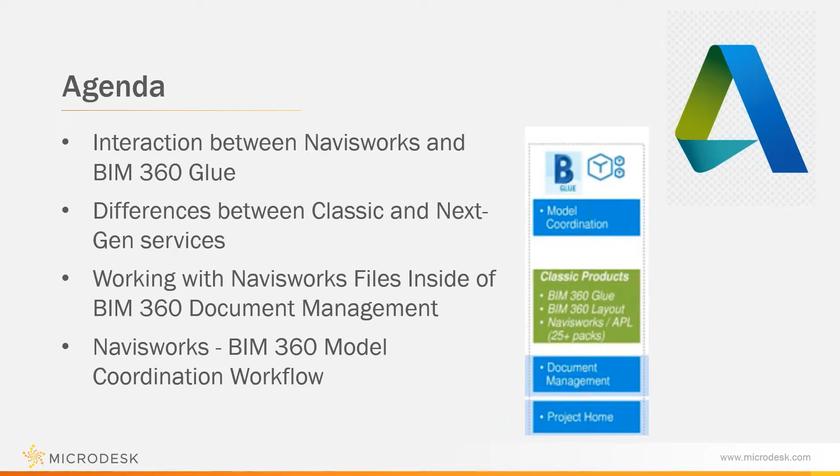The process for traditional clash detection, and how designers sent models to a model coordinator who merged those files in Navisworks, was a time-consuming effort. Everyone had to gather their models and get them to the BIM coordinator, and then he had to go through the process of getting it ready for the next stage.

Once the cloud platforms became more available and more accessible, it shortened that time frame by just allowing people to load their models and have some of that integration happen immediately.

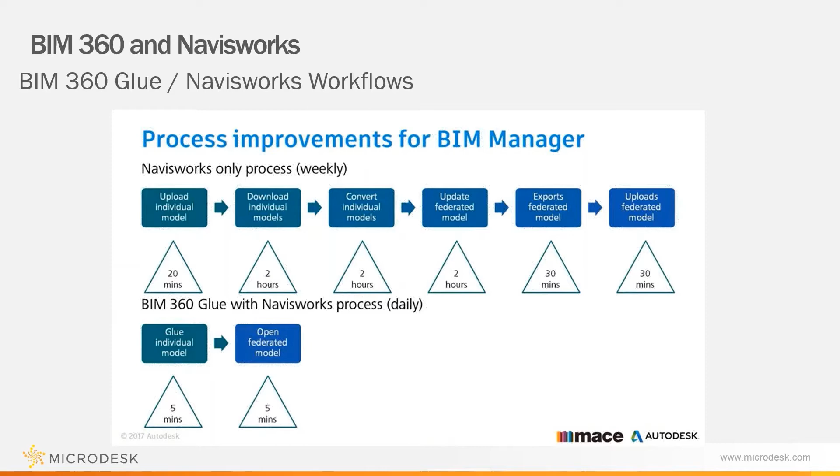When dealing with models coming from all sources to a BIM coordinator, this process involves the model coordinator merging the files in Navisworks. His or her job becomes to analyze the errors, merge the models, perform clash detection, and document any type of collisions.

Some clashes are simple and obvious, but others are not. They can end up with hundreds of clashes that the model coordinator needs to prioritize. It's a heavy burden for a BIM coordinator to understand and filter amongst all these clashes.

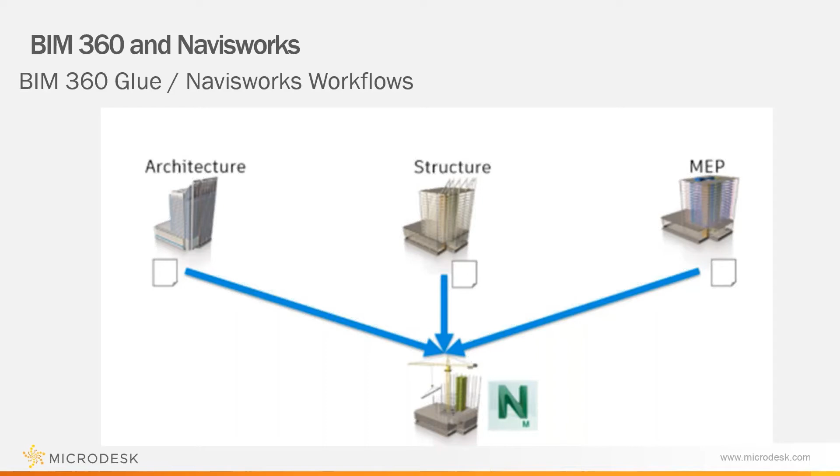You could argue that the different disciplines hand over their responsibility to the model coordinator to check their design for them, when they themselves should have control over their own models and how these fit together with other disciplines' models, so the model coordinator doesn't become the bottleneck in the process.

The Glue Navisworks integration gives every designer in any discipline the possibility to merge their models in the cloud and perform clash detection in a powerful, user-friendly, and simple environment. When working with Revit or any AutoCAD vertical, you could publish the models through a simple Glue add-in, merge your models in Glue, and review your model against other disciplines.

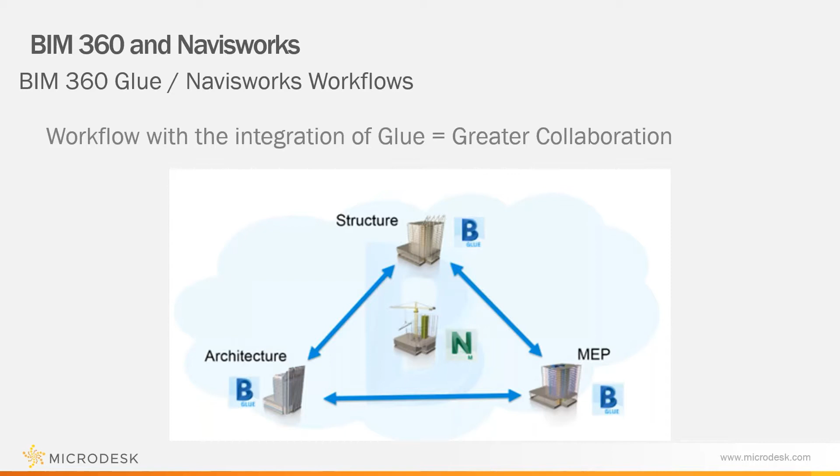The result, when designers and engineers do their own clash detection against the models, will be fewer errors and higher quality models before sending them to the model coordinator. This allows the Navisworks specialist to focus on advanced clash detection, such as avoidance and rule-based clashes. There are various approaches on how you can use Navisworks and BIM 360 on your projects.

It depends on the project scenario which approach is right for you. Tasks such as sharing coordinated models with the team, collecting project models from the team, using the team to coordinate and resolve clashes, and coordinating the project in BIM 360.

Users can take the aggregated project model in Navisworks and share it with the rest of the team in BIM 360 Glue. To do this, you start by bringing the various discipline models together in Navisworks, just like you would do today. Then use the BIM 360 add-in app to glue the models in BIM 360 Glue. This provides access to the latest model and intelligent model data for the rest of the team.

BIM 360 Glue enables collaborative project review workflows where team members can have one-click access to the model, and easily view, navigate, and add markups and comments.

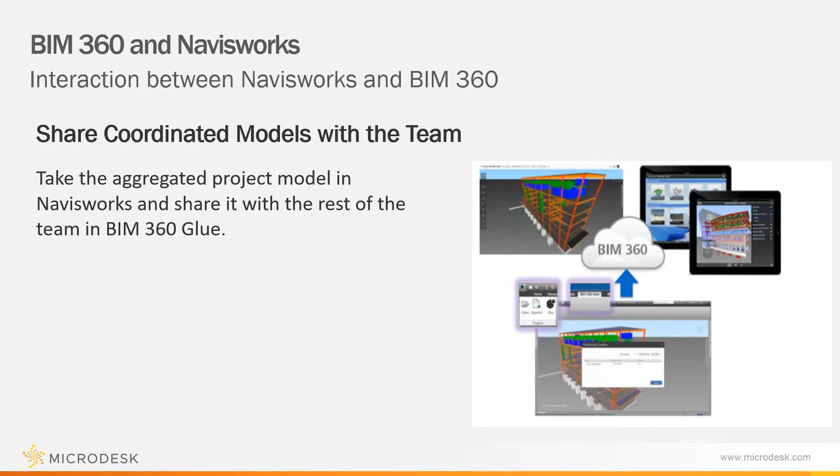Using BIM 360 to gather and manage the models from the team, and then bring those models into Navisworks for coordination and analysis. You can use BIM 360 to collect the models from your team and centrally manage those models with version control, activity tracking, and notifications whenever a new model or version is added.

Once the models are in BIM 360, you get all the other benefits with anywhere access in the project review and markups for the rest of the team.

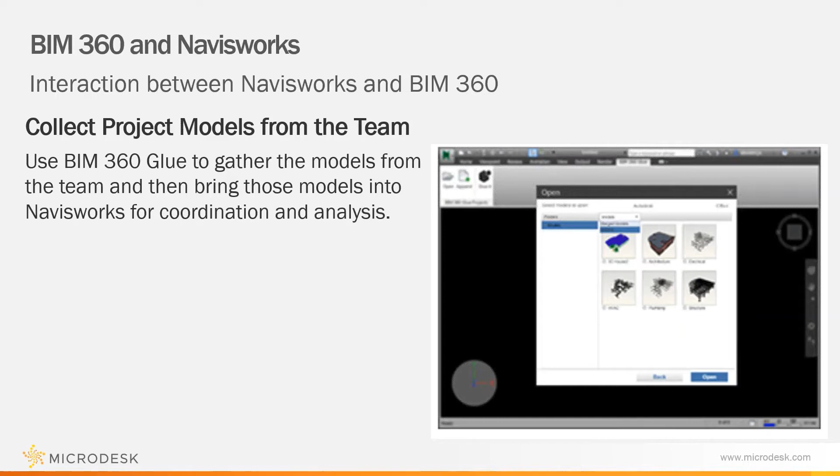You can also allow the team to coordinate amongst themselves, which helps them resolve many of the smaller obvious clashes before their weekly coordination meetings. With BIM 360 Glue, the team has the power to continuously coordinate between themselves and resolve clashes quickly. This continuous collaborative team-based coordination greatly reduces the number of clashes to review at the weekly coordination meetings.

Project teams can use Navisworks for formal clash detection and publish the models to BIM 360 for team-based coordination and collaborative project reviews. It can also be used to provide easy web and mobile access to project stakeholders.

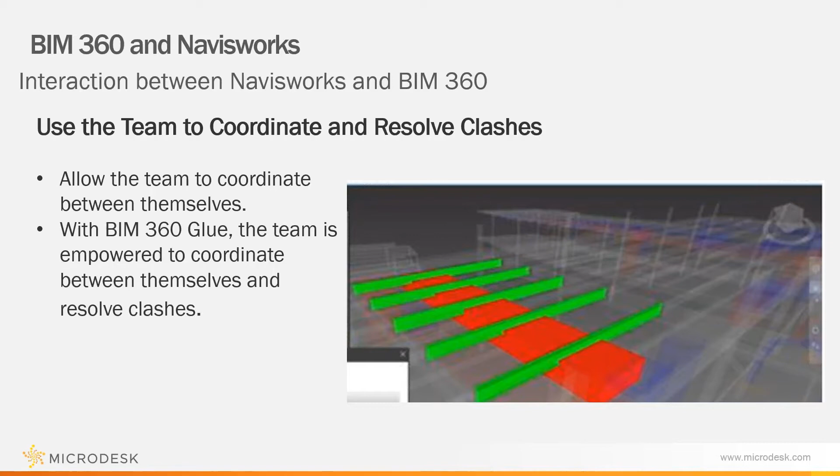We use BIM 360 Glue for all project clash detection and collaborative coordination, and Navisworks for advanced workflows such as model-based quantity takeoff or animated timelines, and to develop stunning renderings.

Some of the workflow limitations that occur with the Navisworks and BIM 360 Glue process are that not all Navisworks specific data that are maintained when viewing the merged models in Navisworks are visible if you open the merged model in BIM 360 Glue. This leads to a siloing of information such as clashes.

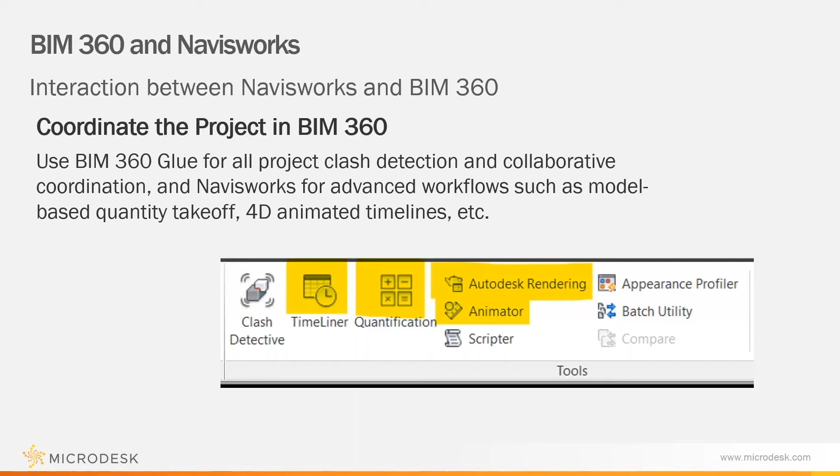You also have a situation where views that aren't shared are visible only in their respective programs, although Glue views are usually shared.

When we are using Navisworks and taking advantage of BIM 360 document management, this integrated BIM 360 Navisworks solution allows you to connect with your team for collaborative project review, coordination, and issue workflows.

In Navisworks, models are merged and can be loaded into BIM 360 document management. Any changes you make to those models in Navisworks can be saved back to BIM 360 document management as a merged model. These changes are maintained when viewing the merged model

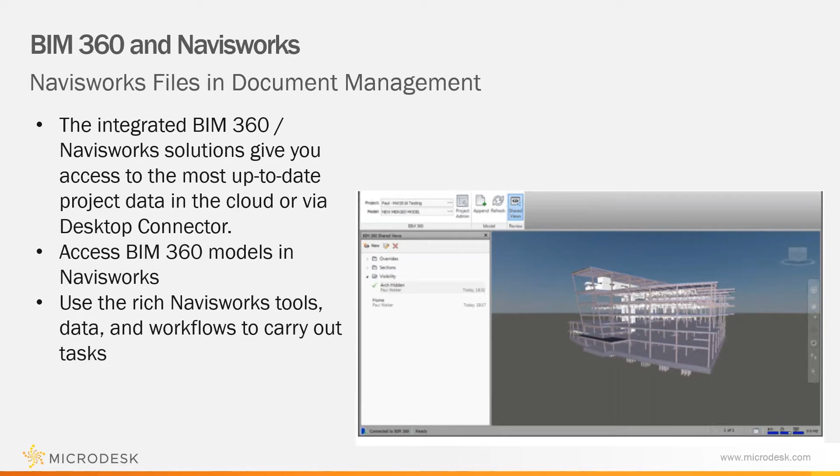in Navisworks and other Navisworks clients. However, if you open the merged model in BIM 360 document management, not all the Navisworks specific data may be visible.

In BIM 360 document management, you can view, create, and respond to BIM 360 issues on the models that are in Navisworks, gaining access through either the BIM viewer in document management or using the desktop connector in Navisworks. Issues created in either program are synchronized, enabling you to effectively collaborate on the models.

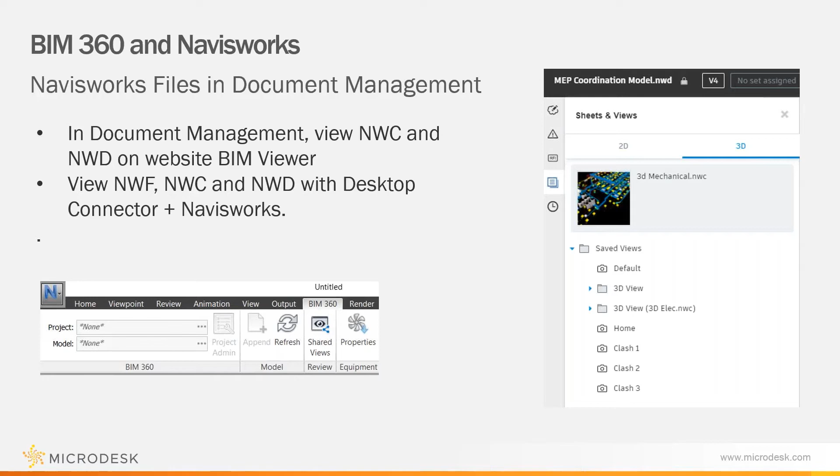Also, views created in Navisworks are seen when open in the BIM viewer in document management.

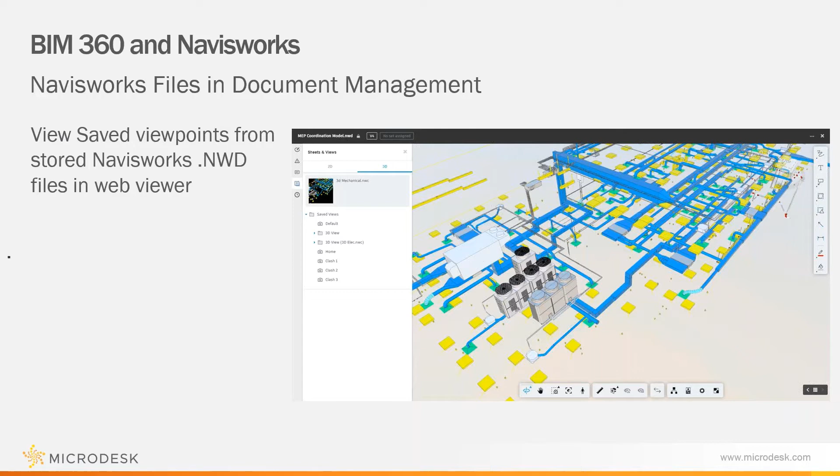You can create and manage issues related to 2D projects and 3D models at a document or project level. Issues are used by teams to identify and communicate areas of concern or improvement with project documents or models. You can work with issues in BIM 360 alone or collaborate using Navisworks.

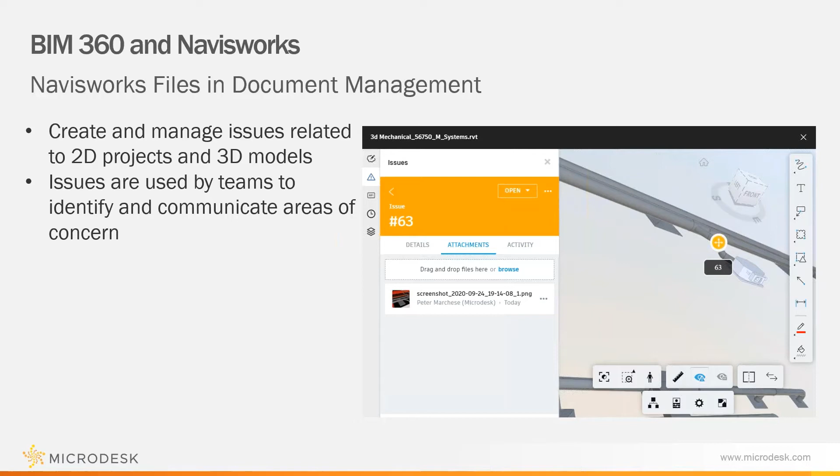But the newest integration is the bringing together of Navisworks and BIM 360 model coordination. This means combining the best of both products, the time-saving automation and cloud capabilities of BIM 360 model coordination, and the powerful Navisworks workflows that have already been proven useful. The integration allows project teams to save time with automatic clash detection, increase the quality of their models, and create

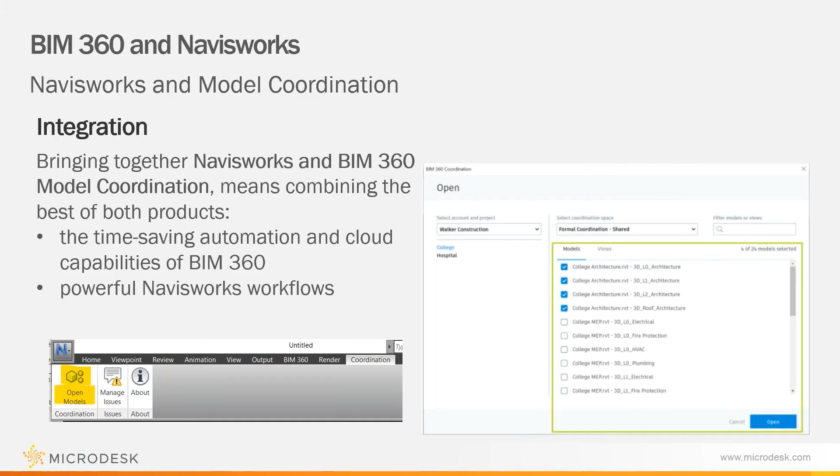a single source of truth for issue management across the entire project team. BIM 360 coordinate customers can now use complementary workflow and benefit from the best of both solutions: automated clash detection, ease of use in model coordination for discipline trade self-checking, and specific clash checking in 4D simulation in Navisworks.

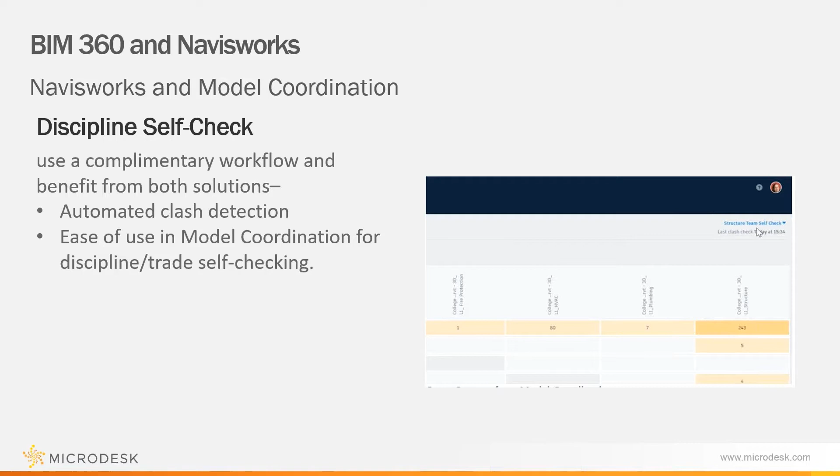Design and trade teams can self-check their models in real time using automated clash detection, while the BIM leader can focus time and resources on the largest constructability issues and open up an evolving data set in Navisworks to run specific cross-discipline clash tests on the latest design data.

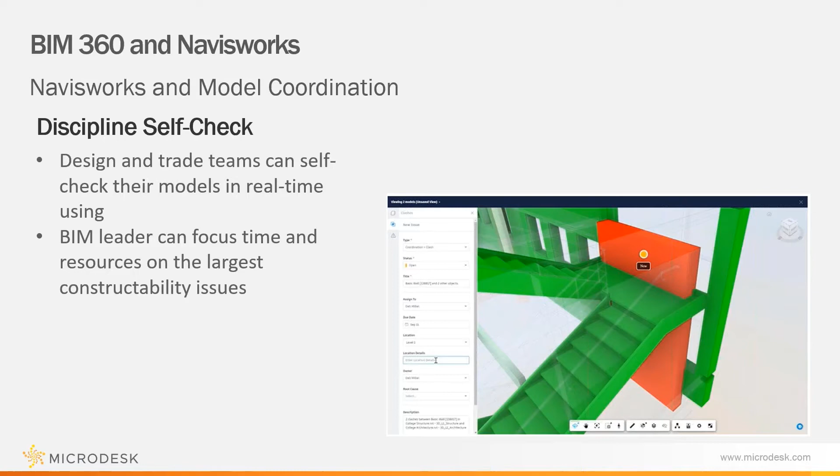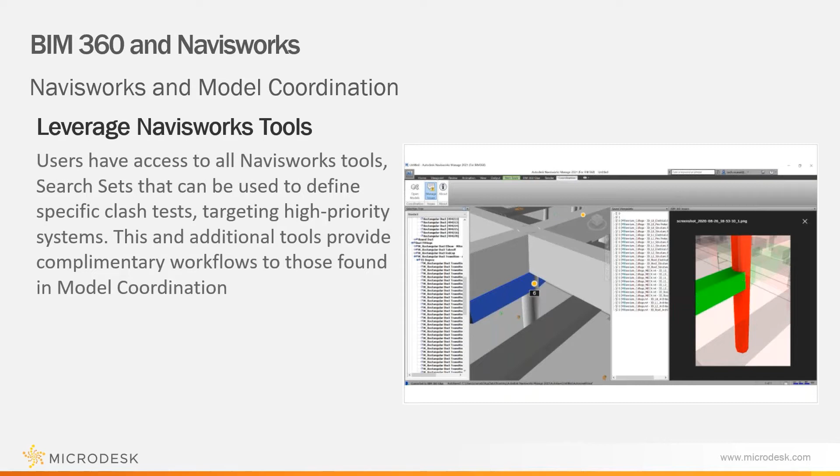With model content loaded, users have access to all Navisworks tools, from Timeliner for 4D simulation, quantification, rendering, and animator to clash detector. Search sets can be used to define specific clash tests, targeting high priority systems and object categories and checking for clearances. These additional tools, providing complementary workflows to those found in model coordination, lead to the uniting effort to support a wide range of projects.

The model can also be opened in Navisworks, where specific rules are applied and the users' expertise can be taken into consideration in order to check for larger constructability issues.

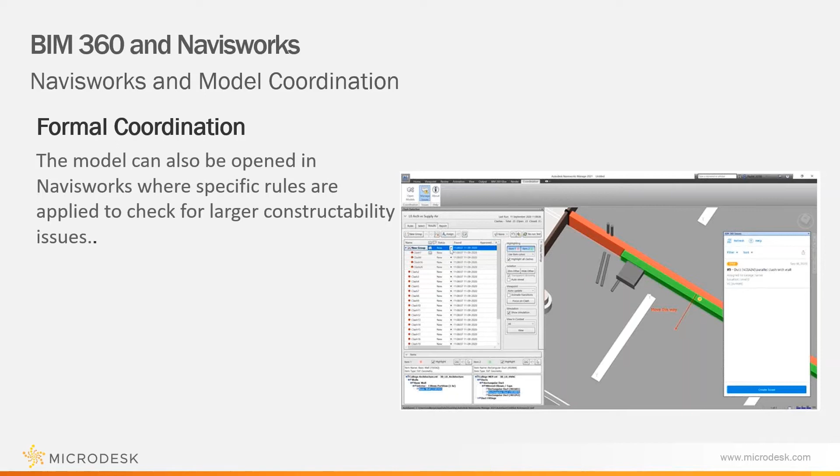Model coordination may now become a full team effort, providing accessibility to team members that do not have experience in clash detection and navigating models. This transparency provides value to your clients, allowing them to easily harness the power of the model and truly understand project design, model development, and issue resolution.

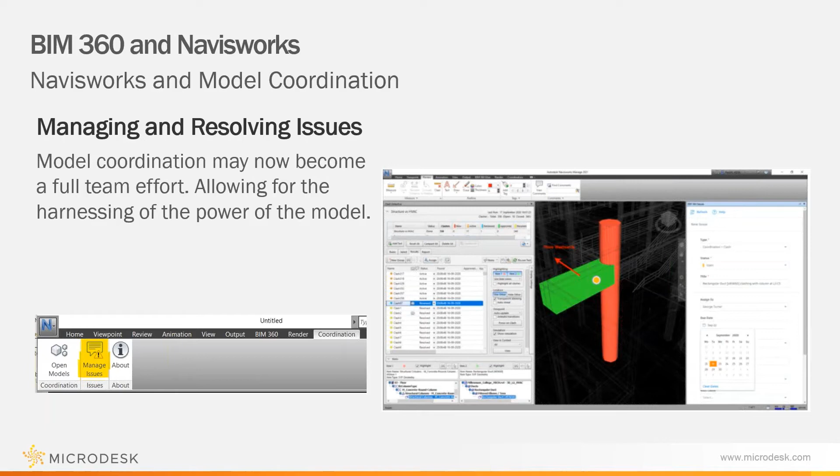With the integrated workflow of Navisworks and BIM 360 model coordination, all project stakeholders, from the field to the office, can now participate in issue tracking and resolution throughout the project lifecycle.

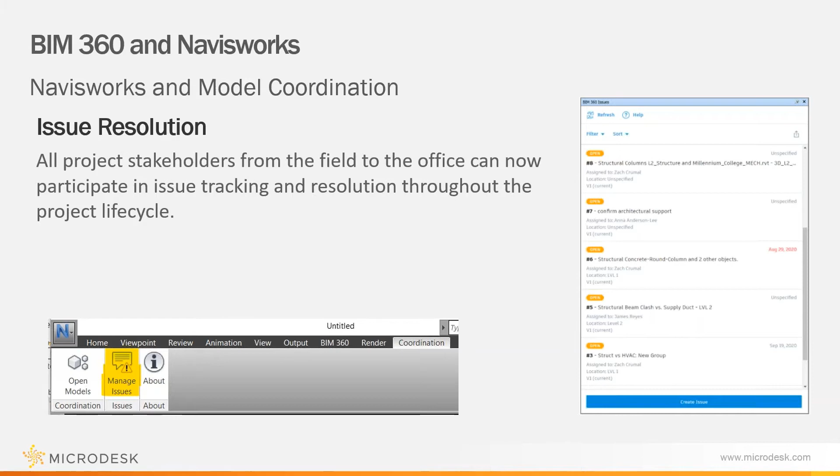Issues created from Navisworks will additionally capture a screenshot, which is attached to the issue that was created, and therefore accessible to users outside of Navisworks. The screenshot will also capture any Navisworks markups, helping to convey detail of the reported problem and information on the recommended solutions.

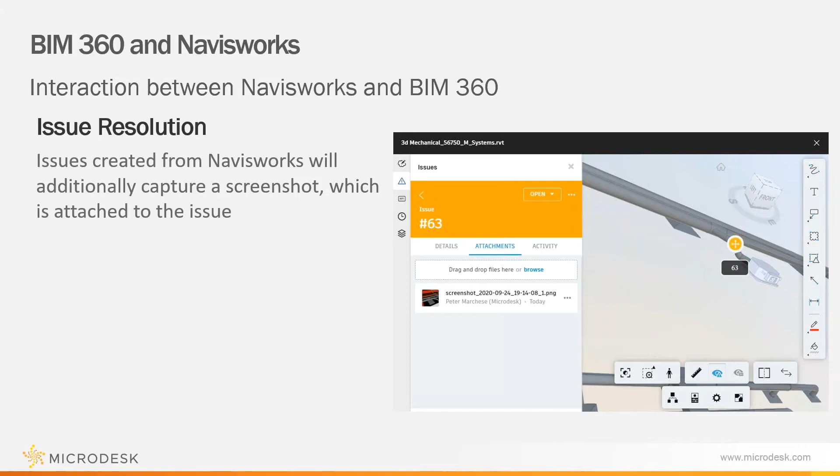Connecting Navisworks to content from model coordination gives users the ability to save NWF files to BIM 360 docs and share these with other connected Navisworks users. The NWF file contains references to the hosted design models and all Navisworks specific data along with the latest issues.

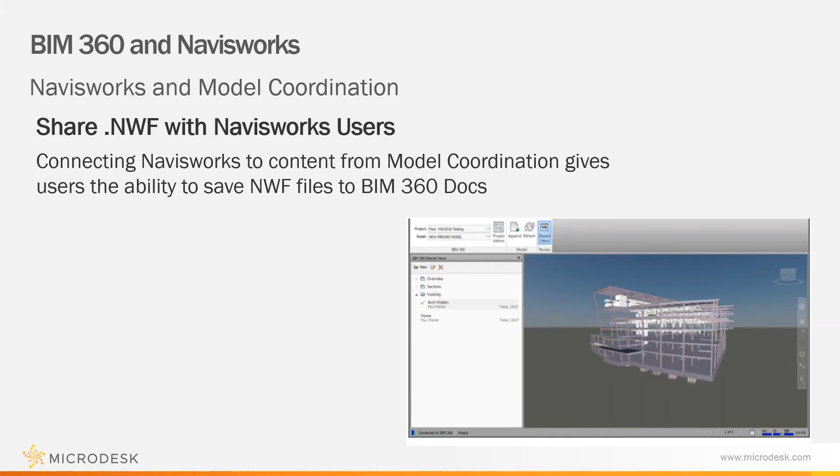So now let's take a step out and take a look at some of these changes that have occurred. So some of what we were discussing is how we can have access to our projects and our Navisworks files inside of BIM 360 document management. If I open up one of the views, you can see here I can open up the NWD file by left clicking on it.

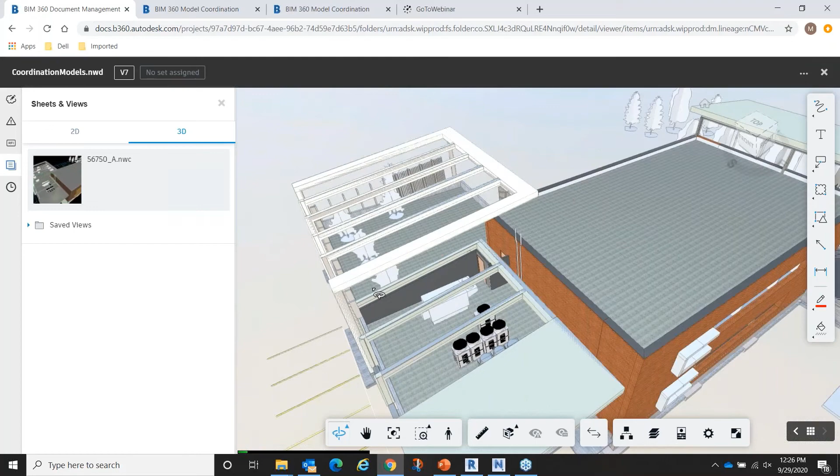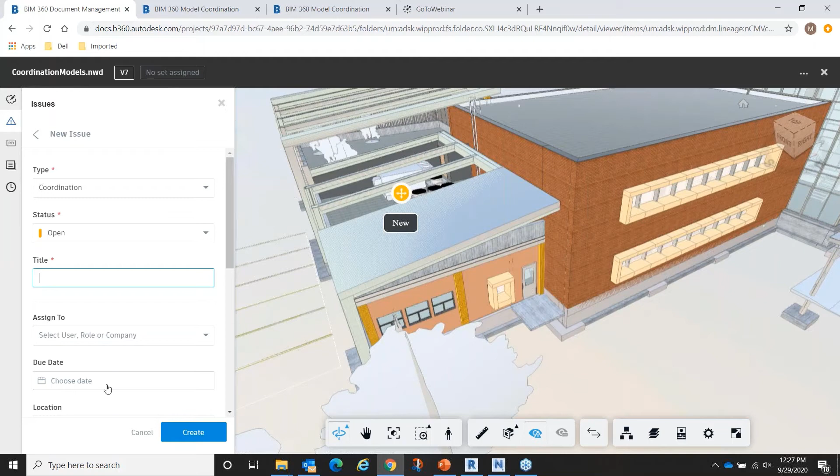So what we have here is the NWC file that I'm able to open in the viewer. I can select items. If I needed to create an issue, I can just choose the issue panel here and select one of the items. I can choose create an issue, select one of my items, and then have this issue be created inside of BIM 360, and then I would be able to view this inside of the Navisworks file, the NWC file.

This issue that gets created, and I'm just going to cancel this for a second, will show up on the list of all the issues. I'm going to back out of this for a second.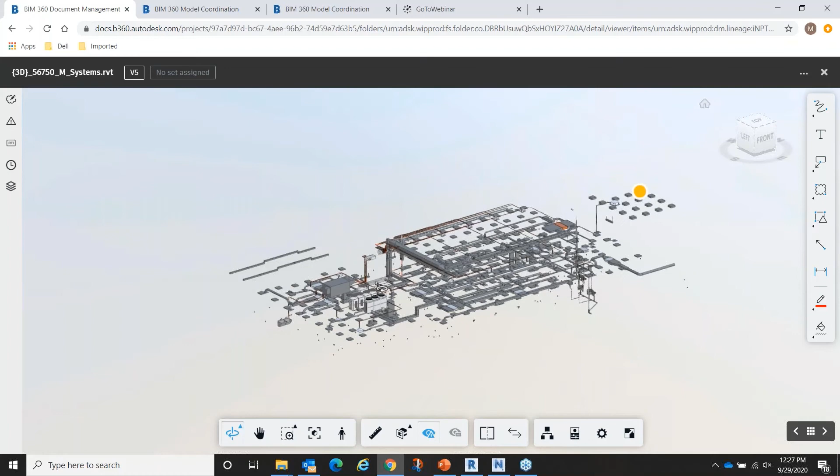You'll see I can do that same thing if I go to the coordination models. I can do that same thing within the BIM viewer, directly opening the Revit project inside of the BIM viewer, and do that same thing. If I want to create issues, I can create issues inside of this. So this is the way that it would show if we were doing this, just loading our projects into document management and then using the BIM viewer to create issues

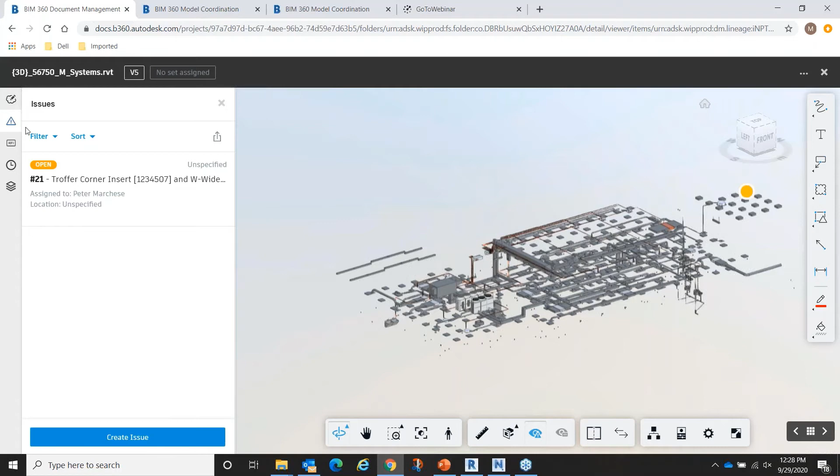and then view those issues. If I wanted to view those issues, I will close out of this and go to my issues tab, and you'll see all the list of issues.

Taking this a step further into what we would do inside of model coordination, the first thing we want to do when we set up model coordination is get our coordination spaces together, picking out what are going to be our coordination spaces.

That's going to be how we navigate from Navisworks inside the BIM 360 model coordination tab. The normal procedure is that as soon as we load those models up and set up the coordination spaces, it automatically does the clashes. This is some of the self-checking that can happen.

We can go a step further by opening up Navisworks, going to the new coordination tab, which is an add-in, and choosing to open the models, getting us directly into BIM 360 model coordination. Left-clicking on the model, on the right-hand side it gives us the model with one of the spaces, and I'll hit the pull-down arrow to show both coordination spaces set up inside the model coordination module.

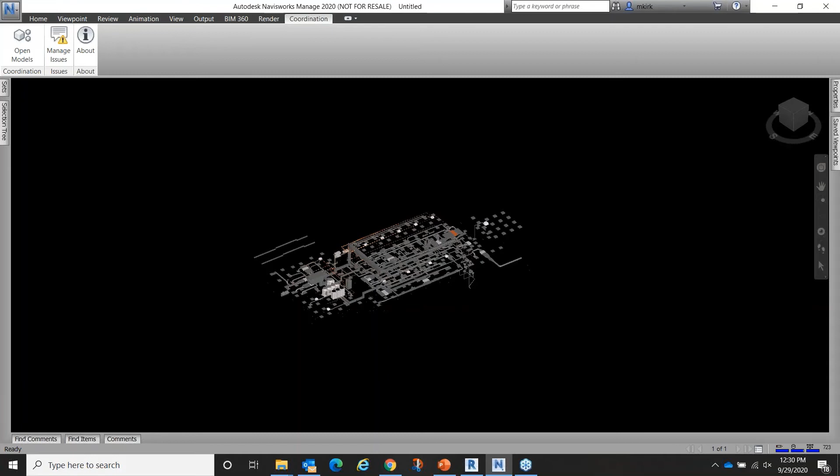While this file is open, I want to explain that since we're taking the Revit projects and creating an NWF file, this can be done by multiple users. Each of us can open up the Revit projects, creating our own individual NWF file, but the issues each of us creates will be saved inside the issues panel.

That's actually the live issues from inside BIM 360, and it'll show me those, and they'll all be saved back in BIM 360. So the next user who opens these same files to create their own personal NWF file will see the issues I created, because it's all going back to the BIM 360 issues list, pulling that information since we're grabbing the Revit projects to do this.

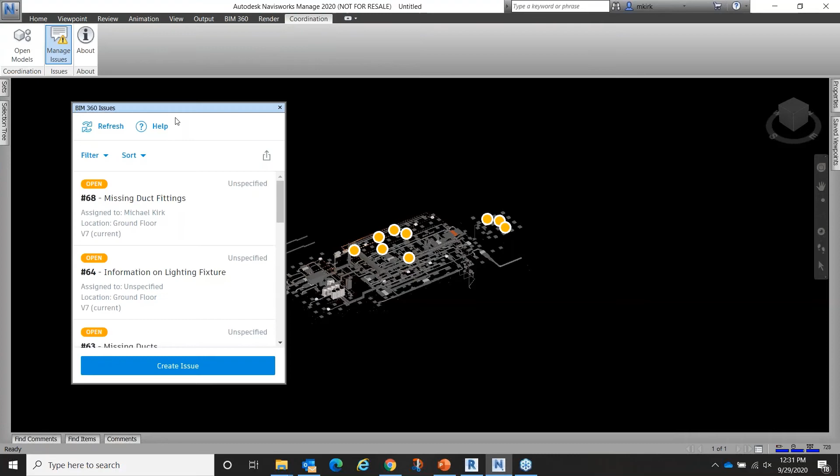So now that that's open, I can turn the issues on so I can see them, and I can zoom into an area.

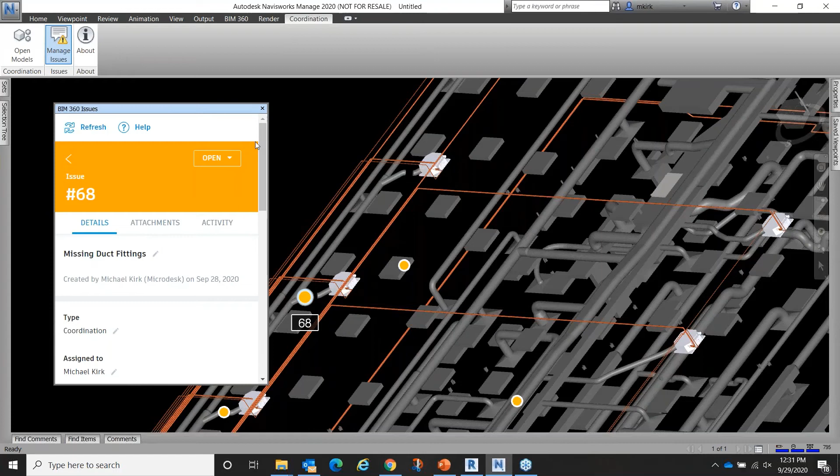One of the other things - if I wanted to create an issue here because we've got a missing duct, we have a couple of other issues here. If I select this, you'll see that was an issue. The other thing you'll see is when I left-click on the attachments for this - inside the issues field, I'll show you that when we get back to the issues field, but this is the issue that we have.

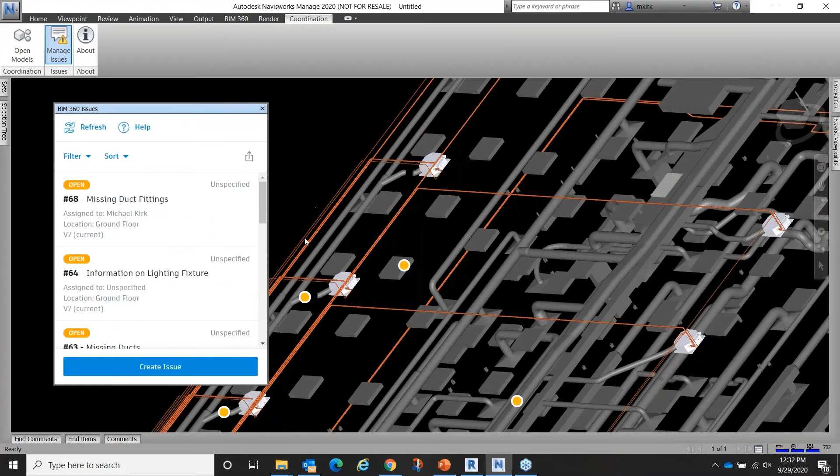If I wanted to create another issue, I'll just go back out of this and choose Create Issue, place where I want that issue to be created, and then give all that issue information.

I can assign it to a user, choose the due date for it, as we would normally do. If we were creating this, what's going to be the location? So these are all of the issue information that I would be doing inside of BIM 360.

So now I have that. If I wanted to create a description, then create that issue.

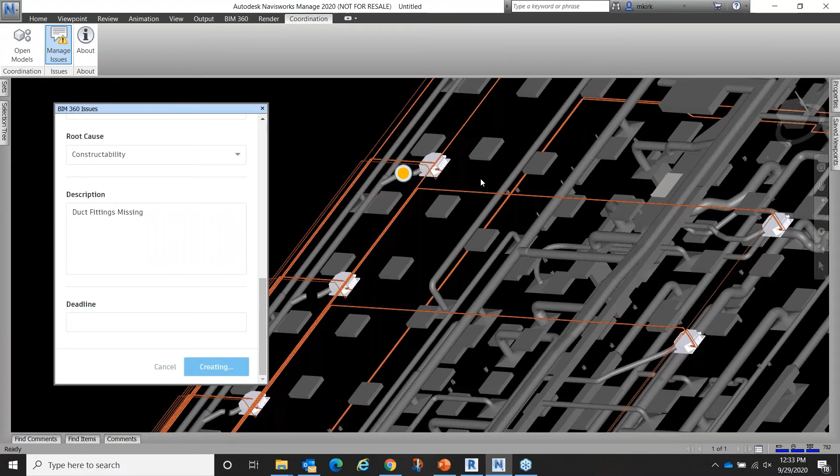The other thing with this - I mentioned each user could create their own NWF files and just pile the issues on, but if I wanted to share this, I can easily just save it as you would normally save an NWF file on the BIM 360 document management coordination folder, or one of the folders I have set up.

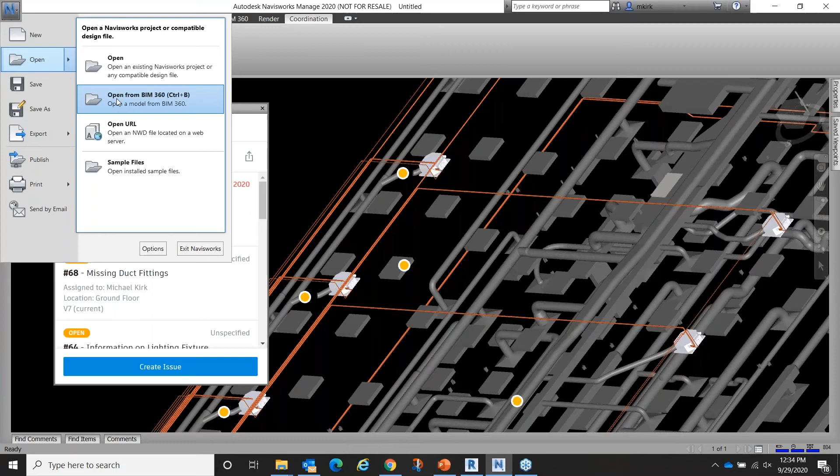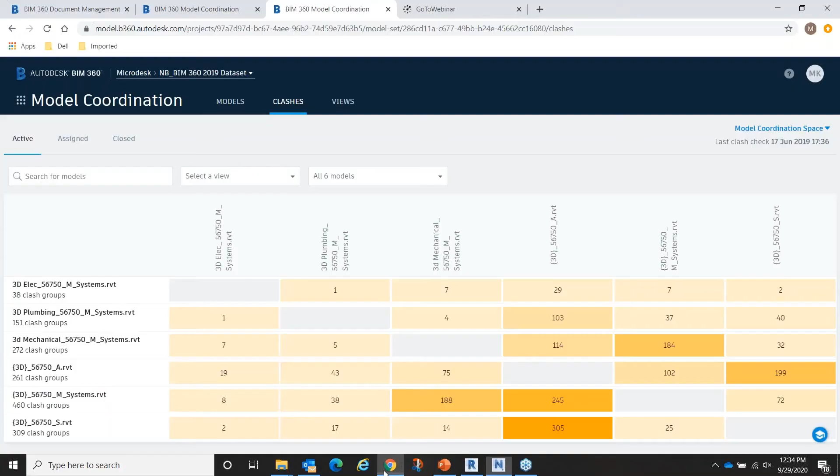That way, another user could then open up NavisWorks and open it up like a normal file, but go through BIM 360 to find the NWF file that I began. That becomes the new issue that's there. If I go back, I'm going to go back to document management.

If I look at issues, you'll see that new issue we created in NavisWorks is now showing up inside the Issues tab in Document Management. That creates a fluid workflow with how we can use NavisWorks and open up our files, gaining immediate access to our coordination spaces inside of model coordination.

We can also save these files as NWF files, and they would be saved into the document management folder we set up. That's an example of the workflow: having our NavisWorks files and Revit files inside document management, using NavisWorks to open files directly from the model coordination module, taking advantage of things like creating additional search sets to be specific about what I'm looking at.

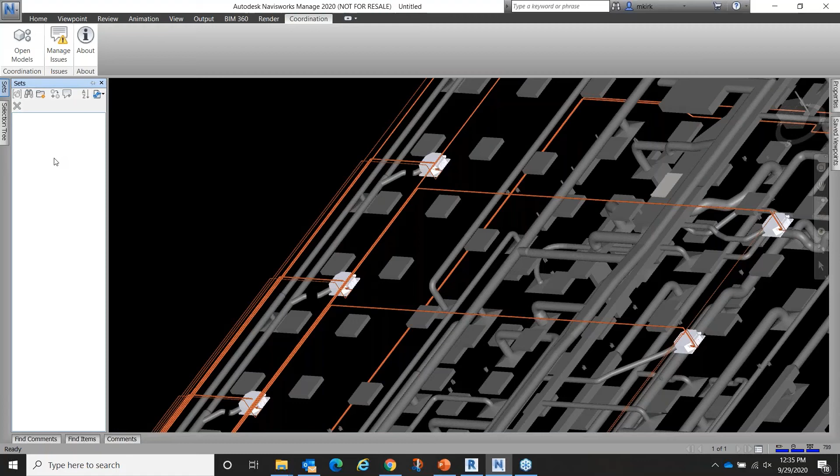I can continually go back and look at the past issues. If I left click on this issue to open it up and look at the attachments, it gives me the actual linked document where this came from. Let me back out of this. So that's how the workflow can occur inside model coordination, document management, and NavisWorks.

So that's what we wanted to show. Let's open it up if there are any questions. I'm looking at the field now.

One of our questions is, can we attach a video to an issue? There's probably size limitations with that, so we'll have to be careful, but I think we can. If I want to do an attachment, it would have to be uploaded from a computer and tell it where to put it, but we'd have to see what kind of limitations there might be.